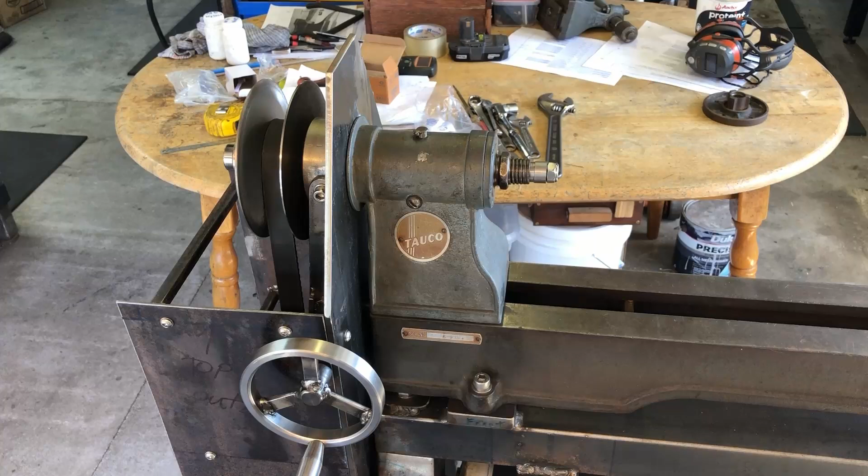Hi and welcome. This is the fifth video in the lathe restoration and upgrades video series.

So in this video I want to finish closing all this area in, which I didn't really get time to do in the last video. And then I want to work on the electrical side of it. So I want to put an on-off switch probably around about here, maybe in line with the wheel center. And then above that, I want to put the emergency stop button that'll be on this panel here. So that'll be over there somewhere.

It's kind of a long switch, so I've just got to make sure it's not going to get tangled up with the belts and pulleys, which it won't. So that'll go there. And then I want to install the RPM gauge or tachometer over here somewhere, and that'll be on that panel as well.

To finish closing in, I need a piece at the back, which I'm going to use some MDF wood. So that's why these bars are sort of offset in from the edge here. So it will be flush with the sides, the back and front sides here. Then it's just a matter of a panel here, a piece across the top and a panel down the back.

Now the piece across the top is important because I'm going to be putting a spindle lock attached to this piece at the top that will come down and interact with a piece of steel that's fixed to the spindle, and that will also act as an indexing mechanism as well, so I'll be able to put it in specific positions for indexing.

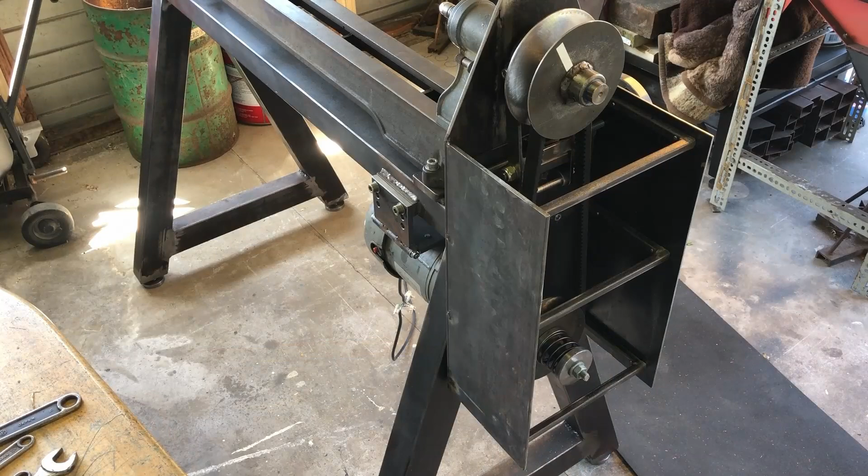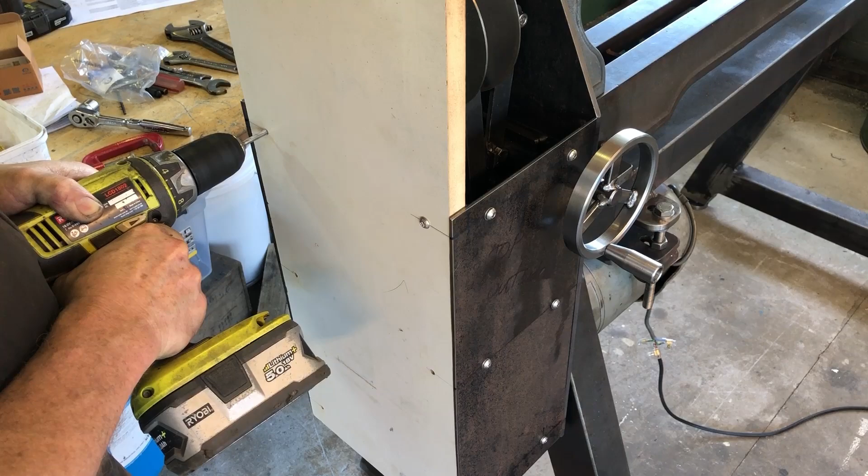Here I am marking out the MDF board. That gets cut to size just with a skill saw, or what we call a skilly. I test fit that in there after cleaning up a bit for the welds, and that fits in there quite nicely. Now, there's a lot of drilling and tapping in this video. I drill and tap all these holes at the back and just test fit screwing that board on, and that works great.

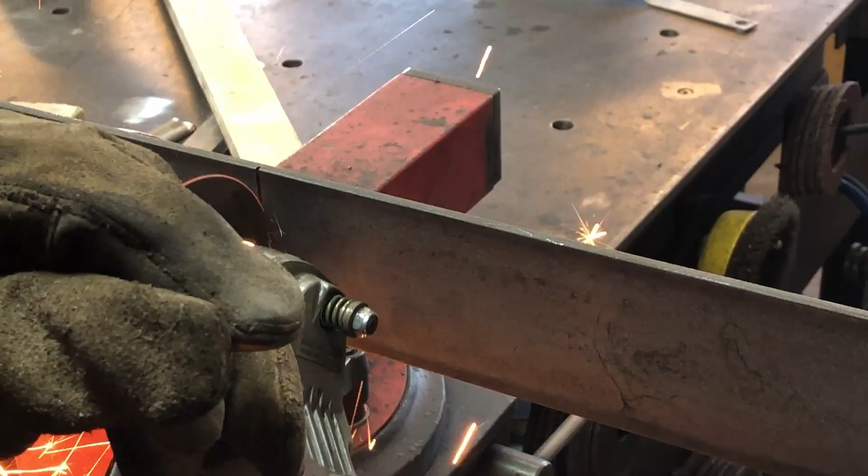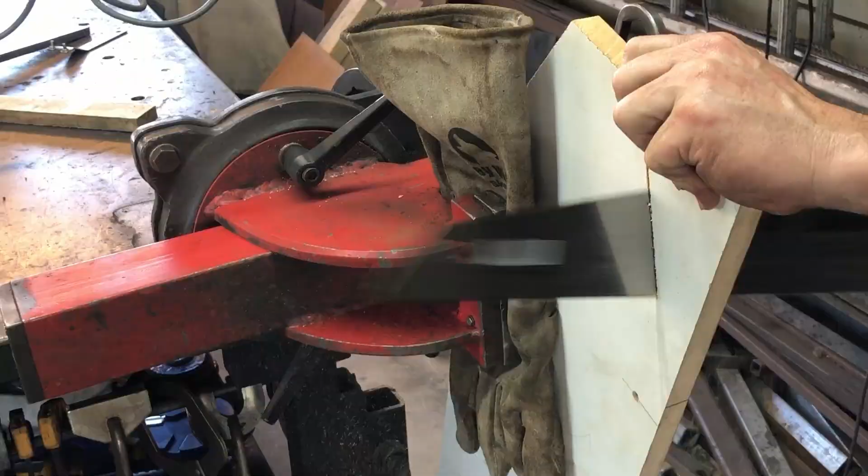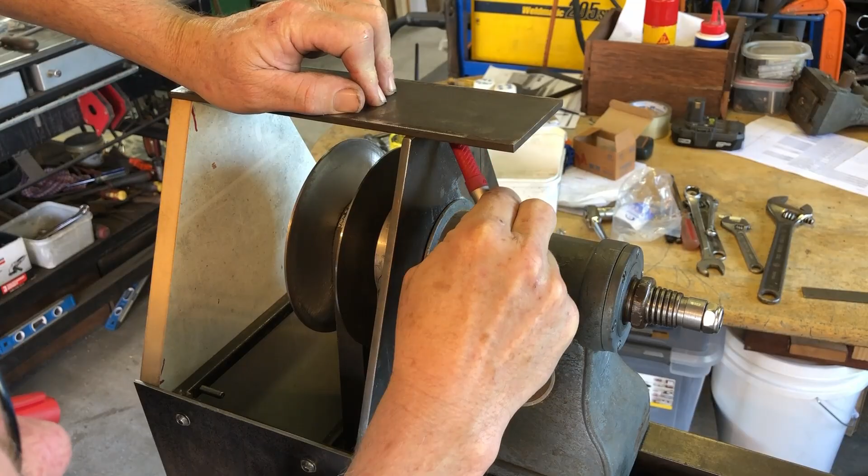This piece is for the top, and I cut it a little bit longer so that I can mark it out on the MDF. I'm just working out here where the angles need to be cut. Those corners get cut off. I just use a handsaw there. And I just clean it up a little bit with some sandpaper. Now I'm just marking off how long I need this piece, and that is cut off as well.

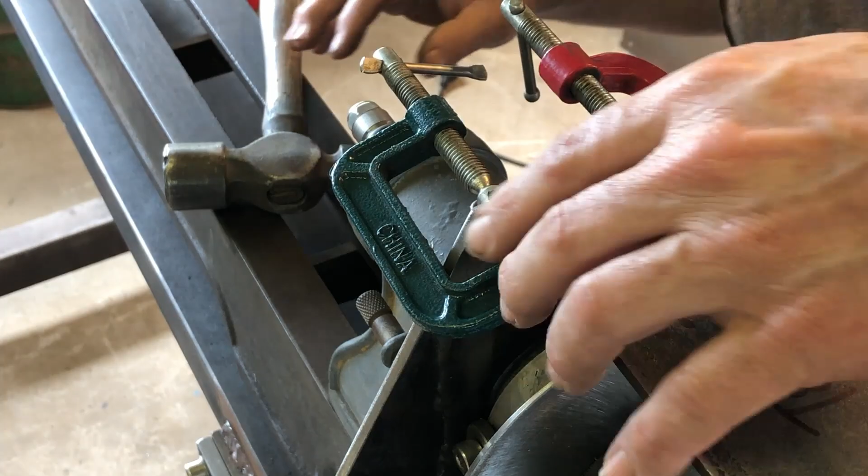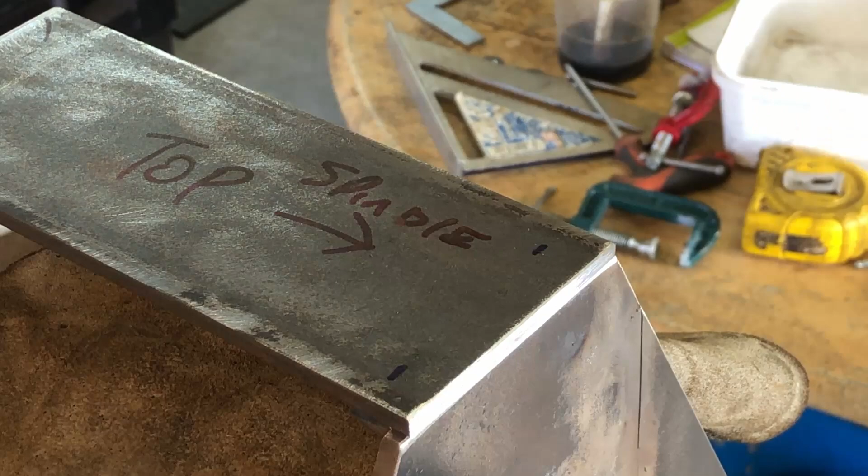That top piece needs to be secured, so here is some 12mm square bar that I use for some brackets. It's clamped on and then welded into place. I work out where I need to drill for the mounting holes. And those are drilled in the drill press, and then I'm using those holes as guides for the threads.

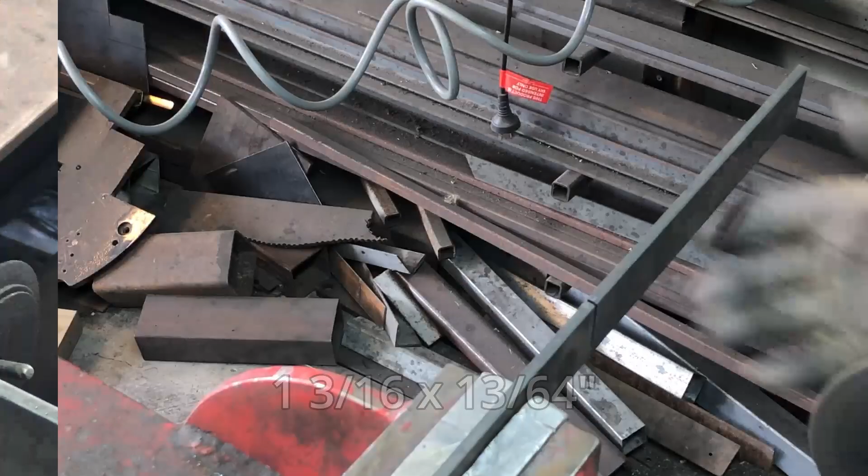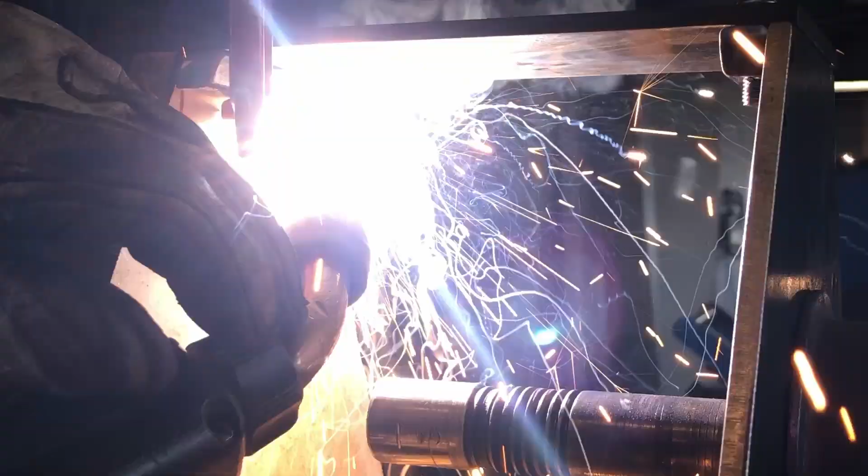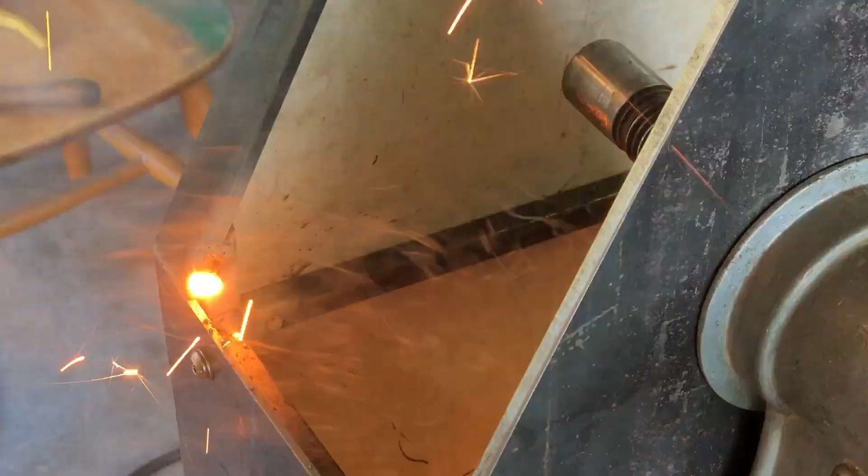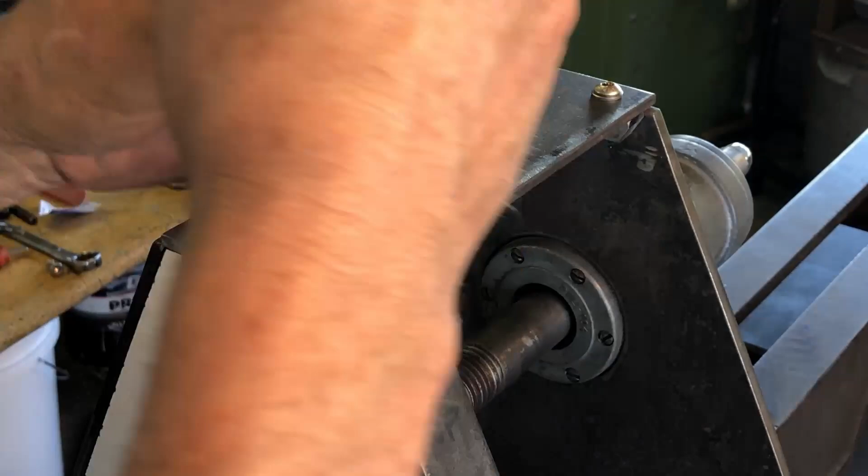I check that the pulley sheave can be fitted in there without any issues. Then I drill and tap the square bar so that this top plate can be bolted on. Now I'll work on the back side of the housing. This is just a piece of 1mm panel steel.

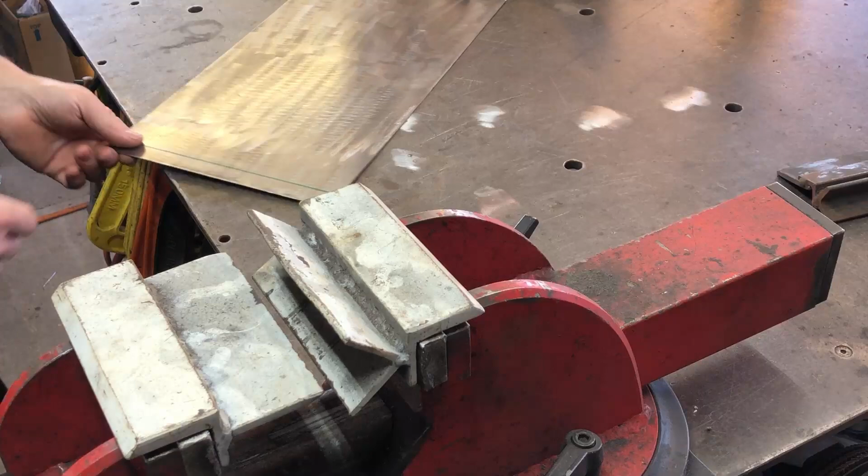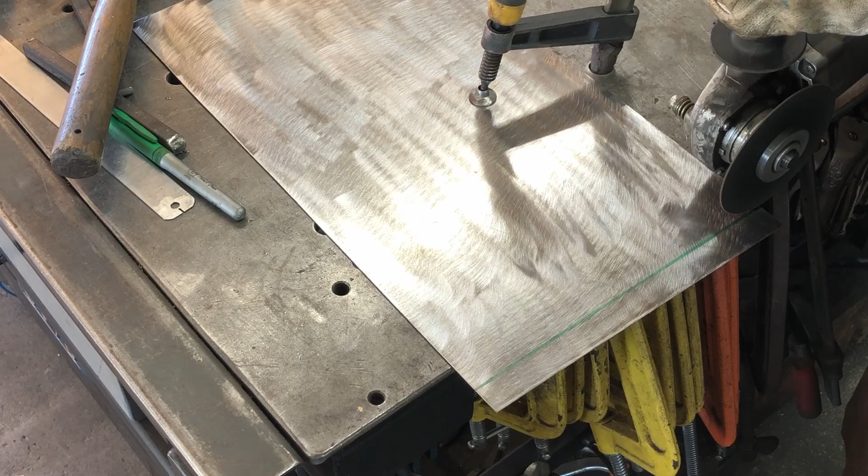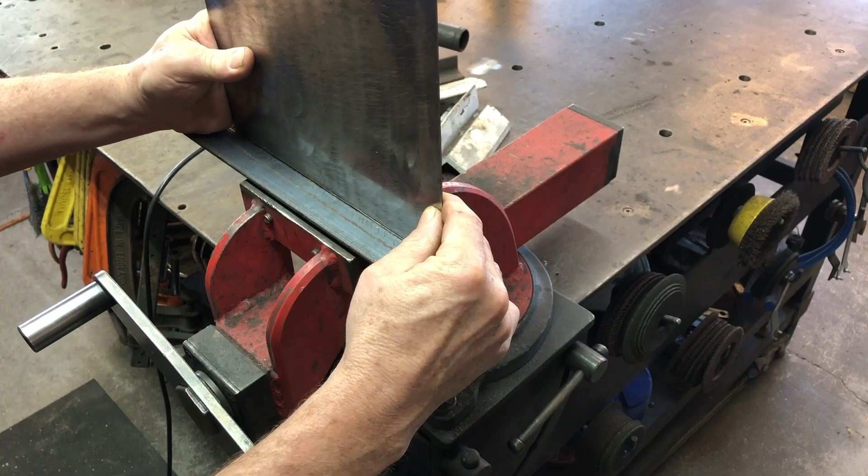I was going to use my vice press brake to bend it, but the bend is too close to the end, it won't work. So instead I score it with the grinder, and then I use some angle iron to bend it in the vise. And this actually works quite nicely. I make a second bend and I just do a little bit of knocking into place there. And then that piece fits on there like that.

Now I've drilled some holes in here. I use them as guides. And then I'm able to drill and tap the holes to hold that panel on. And that is held on by 4 screws, and that part's done.

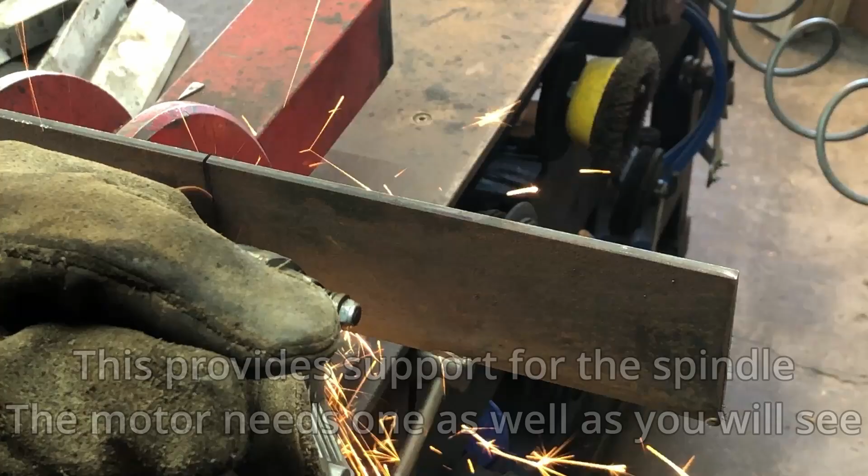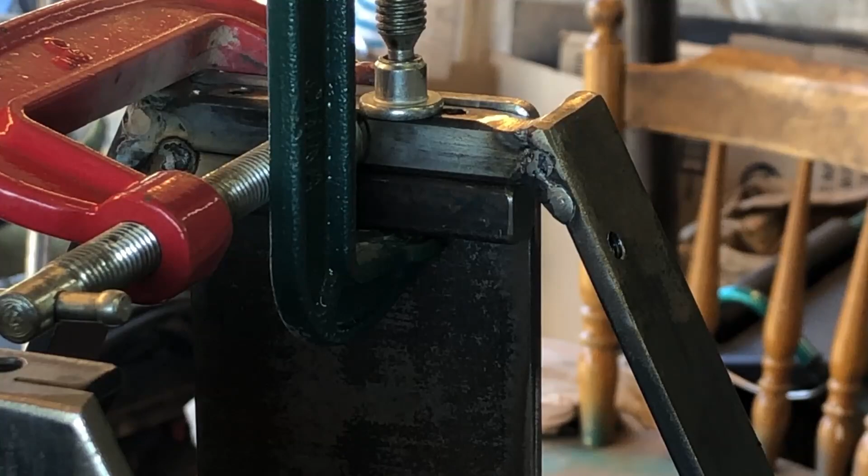Now I need to make a bracket to hold the bearing for the spindle. So there's 2 pieces here. The small square stock gets welded in place. I then drill and tap 4 holes to hold that piece on. Now there will be a hole that gets drilled in the middle of this piece, but I'll do that once I build the new spindle.

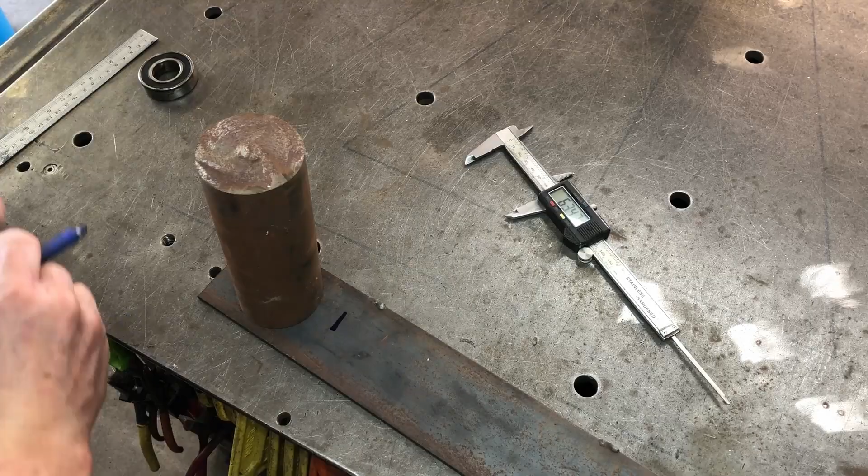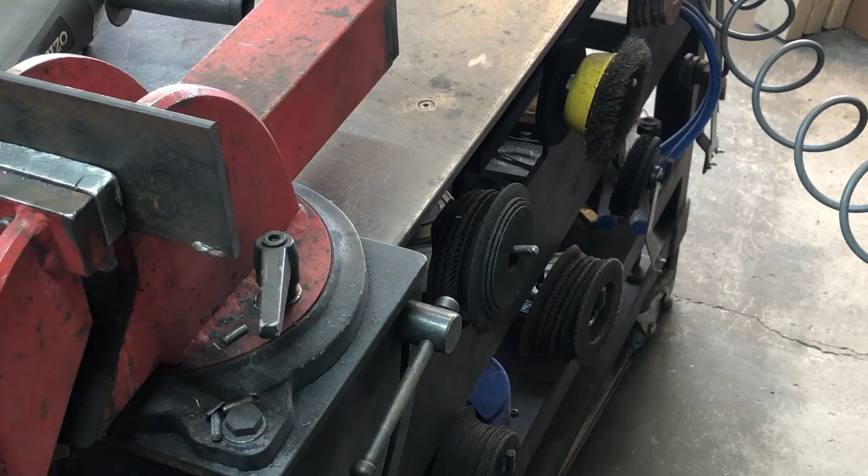The next step is to actually mount this bearing onto a plate that gets bolted onto the plate behind it. Again, I don't have any stock big enough, so I have to make this out of 2 pieces. A bit of flat bar and a piece of round stock. The round stock is cut, and then that will be welded on there. And the round stock will be bored out to suit the bearing.

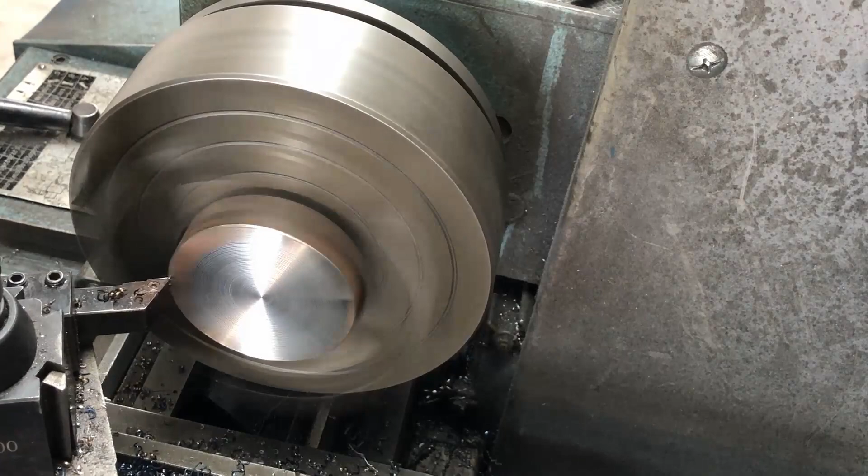I clean up the round stock. And I sort of mark out where it's going to sit inside the flat plate. And then I can bore that out. So this is bigger than 25mm, which is the spindle shaft. Also score a line on there so I can line up this round stock again. That is clamped in the vise, and then I can weld that onto the plate.

That is then drilled out and bored out so it's a press fit for the bearing. Now I found a new bearing that is the same size, so I'm going to use that. And we just press that in with the vise. That fits on to the shaft, which is good, and it will actually get bolted onto this plate at the back. I'll do that when I have built the spindle, so I can line everything up properly.

The next step is to build a spindle lock, which will go about here. Now it's getting a little bit tight, and I only have about the width of my ruler here, which is about 1 inch or 25mm. If I need more room, I can also move that set screw back a little bit and then turn down the sheave. I drew up a plan last night for the 24 divisions, which are 8mm holes, and I need a diameter of about 80mm to fit those 24 holes in.

So I think I'll get it out of this piece of plate here. This is the widest piece of steel I've got, which is 13mm. I mark it where I need to cut it out, and then I do that with the grinder as my plasma cutter still is not working. Then you sort of end up with a kind of a round piece. Let's put in the four-jaw, and it's bored out.

And now I'm working on the shaft that'll go down the center. That is pressed in there. And then I weld it on the other end. Now I forgot to put a center in the shaft when I had it in the lathe last time, but luckily I have this machine part at the back that I can still dial it in. This sounds a little bit like a wood lathe where you make a square piece of wood round.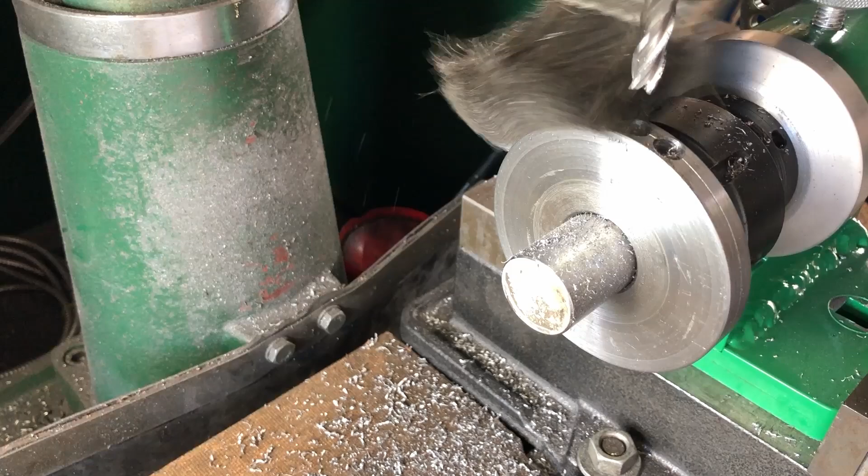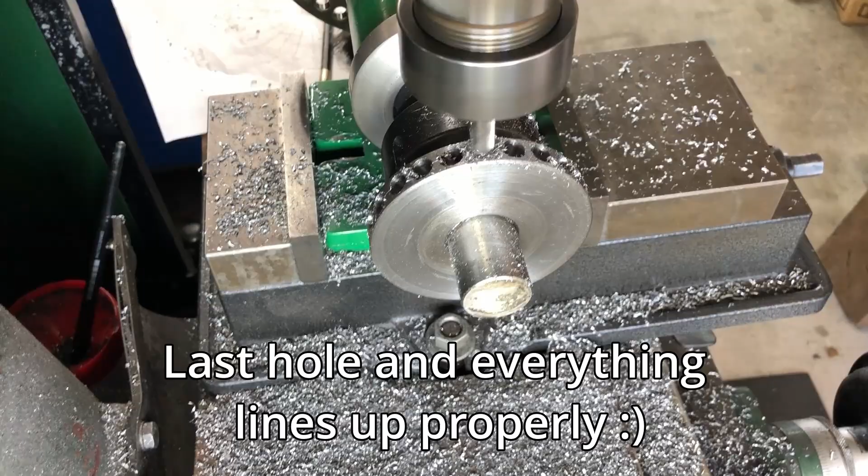Now I've set up in my spin indexer and I'm milling out the 24 evenly spaced holes for indexing and locking the spindle. That's another view of the other end of the spin indexer. This is the last hole and I'm pleased that it's all lined up nicely there. So that piece goes on there, and the bearing and the back cover.

This is how this all goes in here, and I've just got enough room to fit everything in here, so my calculations worked out pretty good. Anyway, the pulley sheave goes around about there. Then we have the indexing wheel, so that's just hard up against the pulley sheave. And then the bearing is at the back here.

Now I haven't bolted this bearing to the back plate. I'm going to do that when I replace this spindle shaft, and then I'll have one piece of steel. At the moment, all I've done here is I've just extended the spindle with a piece of steel, just sort of the right diameter, but it's not exactly perfect. So I'll work out where this needs to be bolted once I get the spindle shaft done.

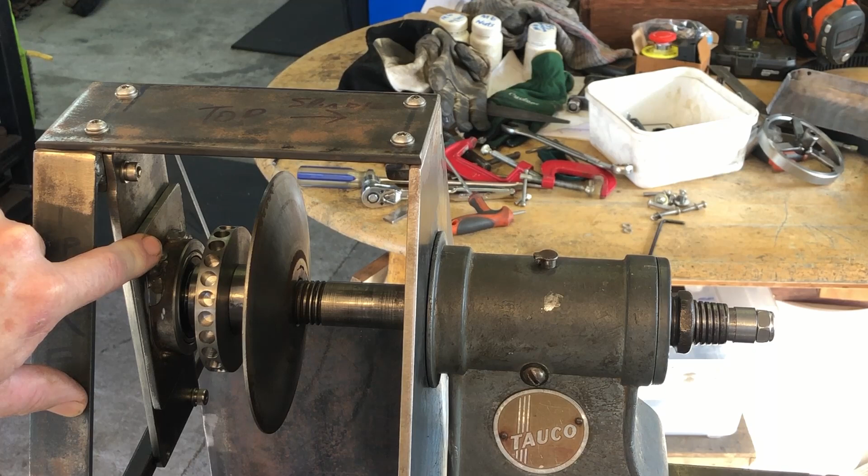So the next step here is to make some sort of detent that can go into these holes, and then that will pop through the top here, so I'll be able to turn a knob and it will drop into one of these holes to lock the spindle. And also there's 24 evenly spaced holes in here, so that can be used for indexing as well.

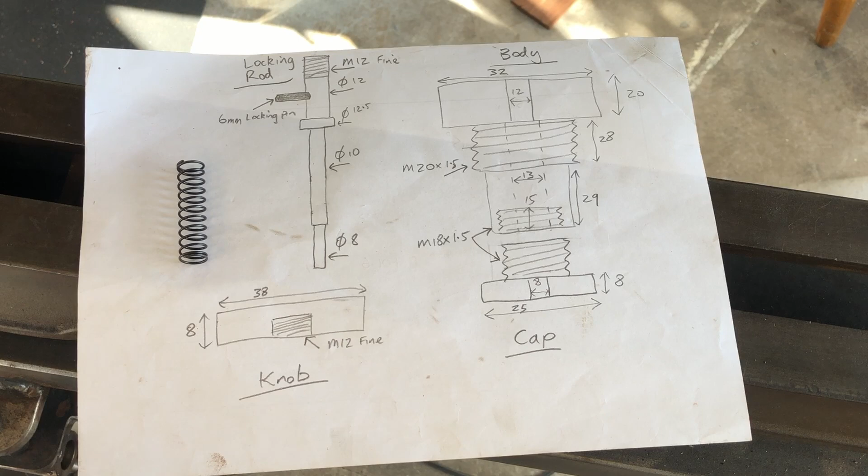Now I'm going to start working on the detent mechanism to lock the spindle. I've looked in my box of springs and I think this is a good spring that will work for this mechanism. So I basically designed the mechanism a little bit around the spring, working with what I've got. Including the spring, there's 5 parts. There's the body, there's a cap, there's the locking rod, and there's a knob. The knob actually screws on to the end of the locking rod up here.

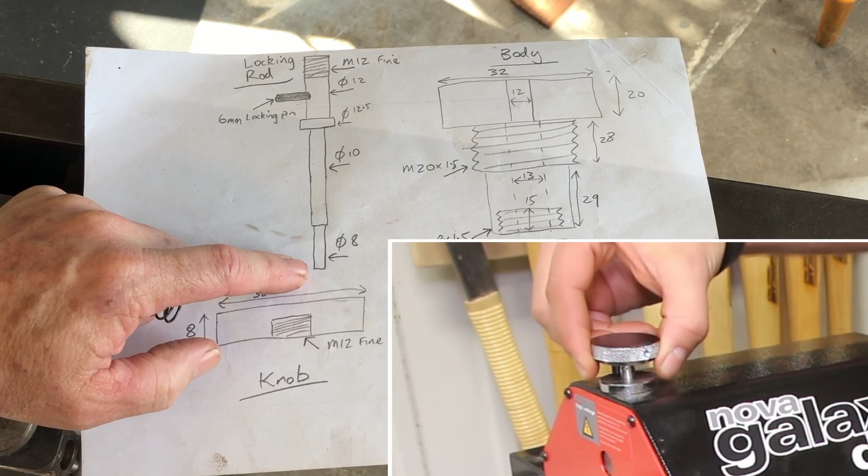Now I've seen companies do this 2 different ways. The Nova lathes by Teknatool have the spring sort of at the top here, so the plunger or the locking rod is always pushing down, always wanting to be engaged into the disc with the holes in it. And it has some mechanism at the top where you have some locating pins and you can actually lock it open. The other way is having the spring at the bottom where the tension is always pushing the locking rod away, and what you do is then you push down on the knob to engage the locking pin or locking rod.

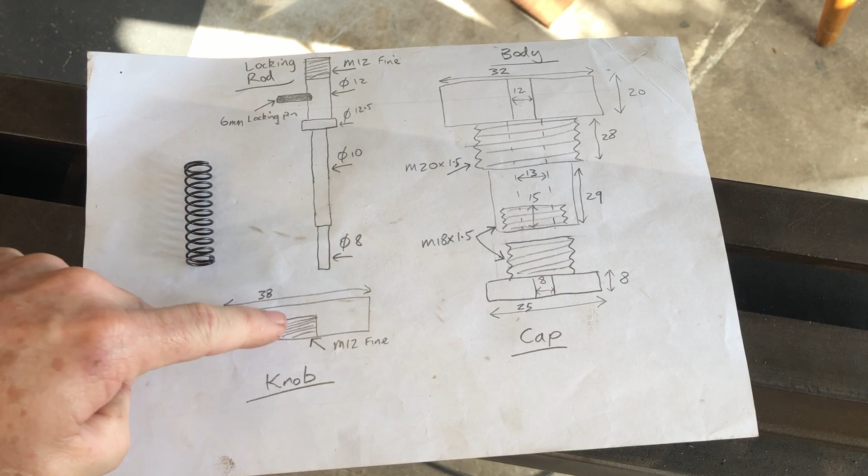And I guess the disadvantage of the Nova way, where it's always pushing down, is if something malfunctions there, then the rod is going to want to go into the holes when the lathe is spinning, and that's not a good thing to happen. And I guess the disadvantage of the other way, where the rod is always pushing away from the holes, is that you need to put pressure on the knob to lock it in. But that's not useful for when you want to do indexing, where you need to lock the chuck and work on your workpiece for an amount of time and then move it to another position and work on it again.

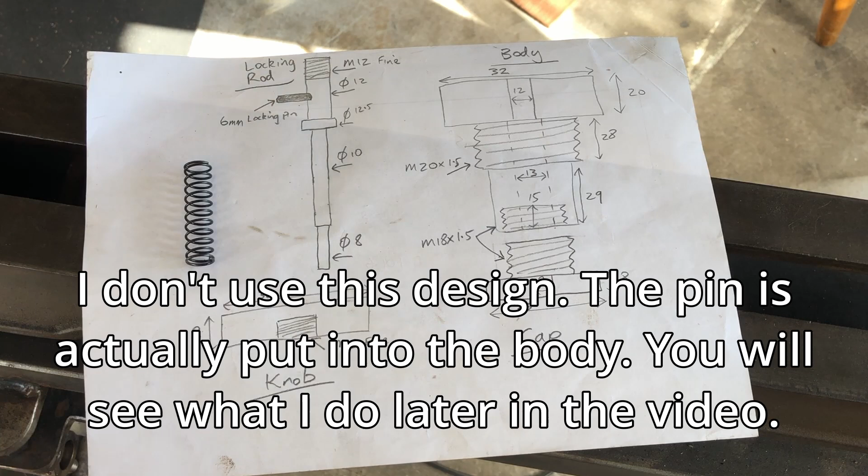And I've seen some people use blocks of wood and magnets to hold the knob down or engaged, and making up all these other ways to do it. So that's what this little 6mm locking pin here is for. That's so that you can actually push down on the knob and then turn it, and it will stay engaged. So sort of get the best of both worlds there. So anyway, it's just a kind of a plunger design, probably don't need to speak too much about it. So let's get into building it.

So I start working on the body. This is 32mm steel bar. And that's turned down to 20mm initially. And I don't have a M20 die, so I single point thread this part. And that nut fits on there nicely. Now I do have a die for the M18 for the end where the cap goes onto, so that is threaded. I drill the centre out to 12mm and also parts of it out to 14mm for the spring.

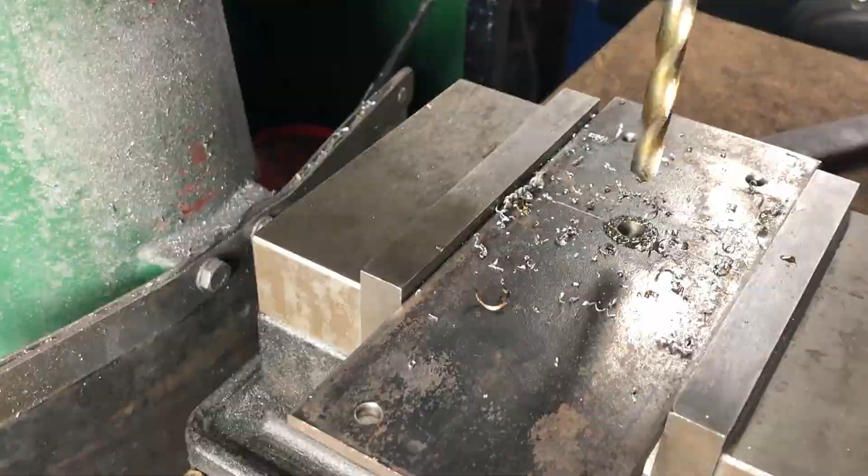Now I work on the cap. That has a 8mm hole drilled right through it. And then I'm cutting the M18 thread here to screw onto the body. And that fits nicely. Now I'm drilling a 20mm hole in the top. This is where the main body will go through. And this is how it all fits together.

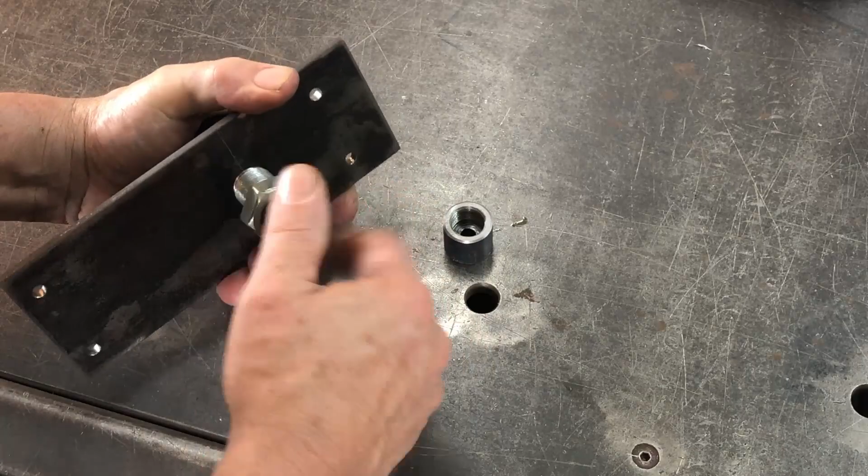I start working on the locking rod, and this is turned down into several different diameters for different parts. So where it locks into the indexing wheel, the inside diameter of the spring, and also the part where it screws into the knob at the top. I assemble that up and test it out, and that works very nicely. Now I start working on the knob, and I start with knurling the outside. And then I sort of taper this in a little bit here.

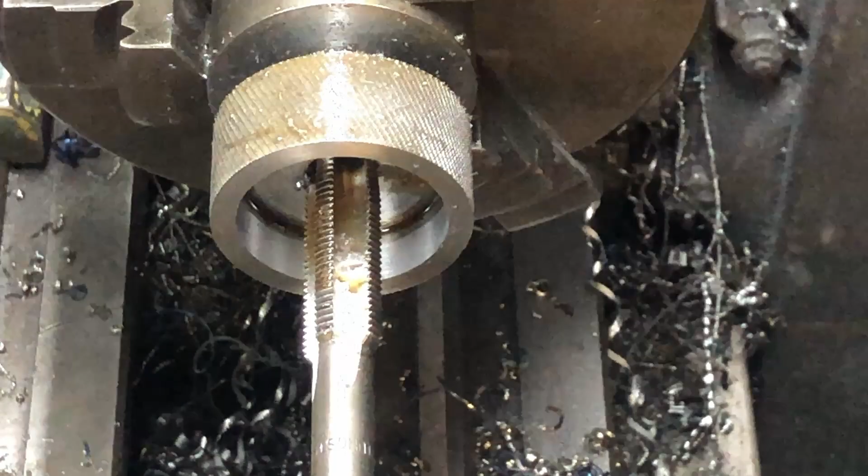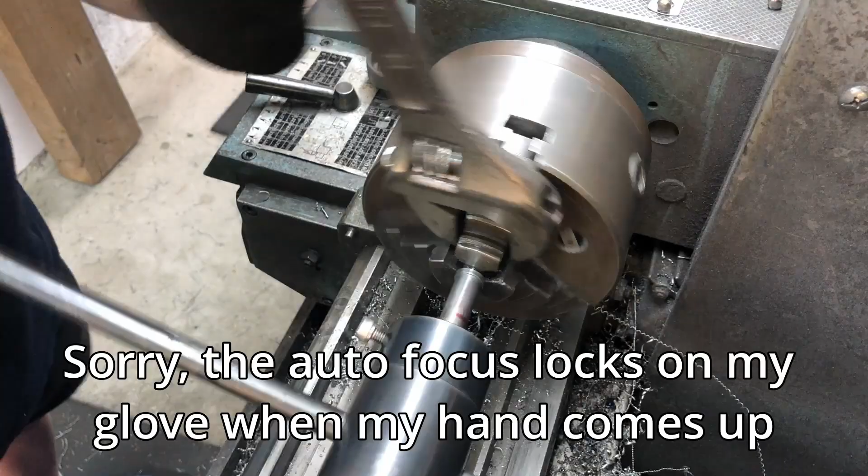I have to take the inside out to fit over the body. And I'm just cleaning up the centre hole so that can be threaded out to M12. Put a couple of chamfers there. Now I am threading the locking rod for the knob. And that fits on there nicely.

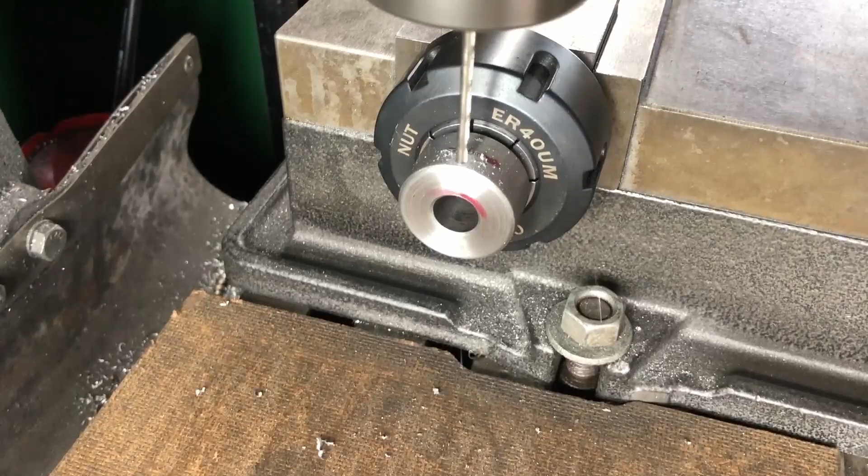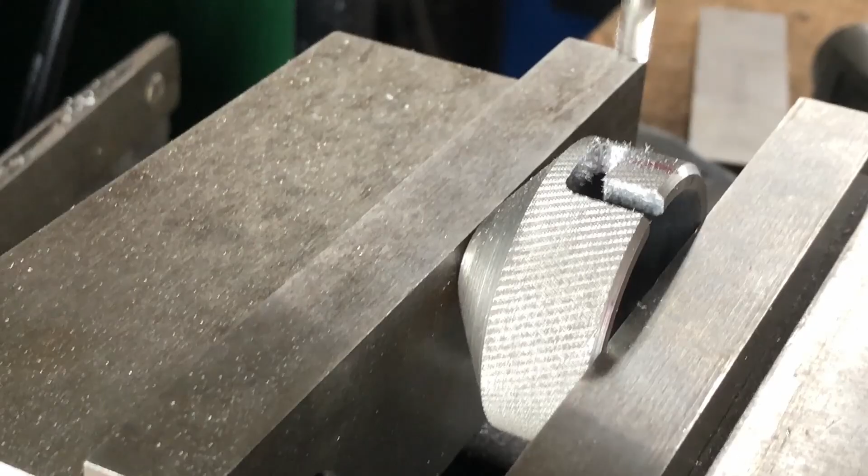This is where it's different to the plans. So the roll pin is actually put into the body here. So I drill a 3mm hole and press that roll pin in. Now I have to cut out the slots for the roll pin to come through the knob. Now we assemble it all up. And this is how it functions on the machine.

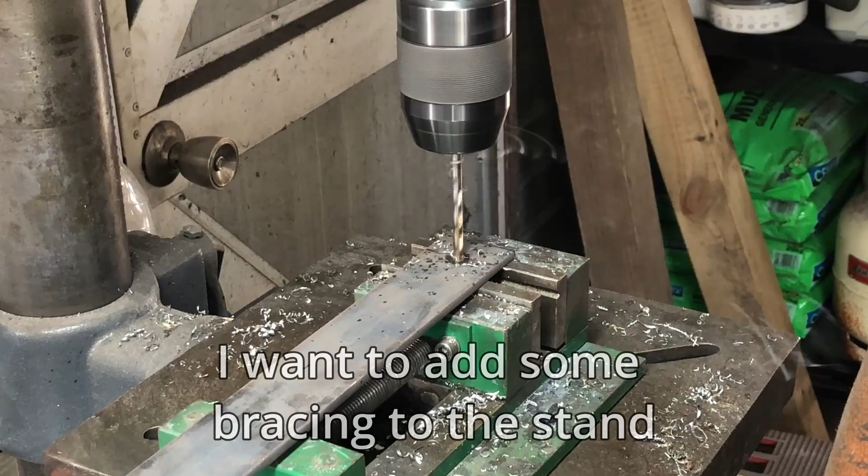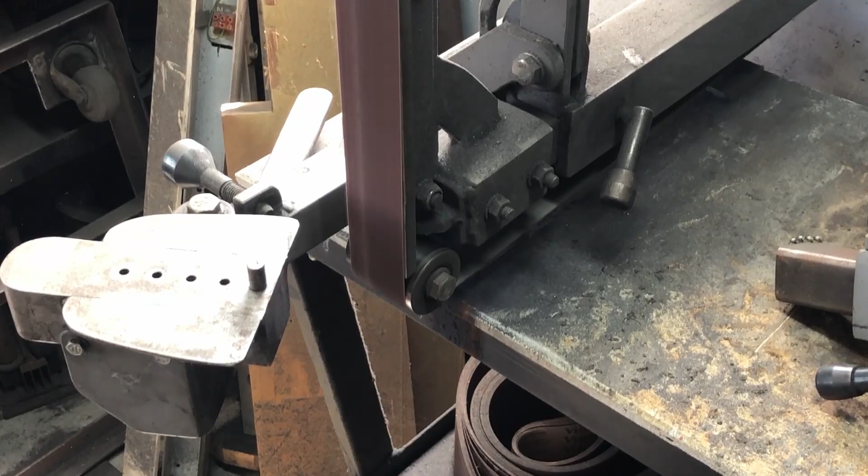Once that is all done, I wanted to add some strength to the stand. These are cross braces that go at the back of the stand. I drill them out to 10mm for 10mm bolts, and I use my homemade radius jig here to round off the ends. These are angle brackets that I've welded to the legs, and I bolt on that brace.

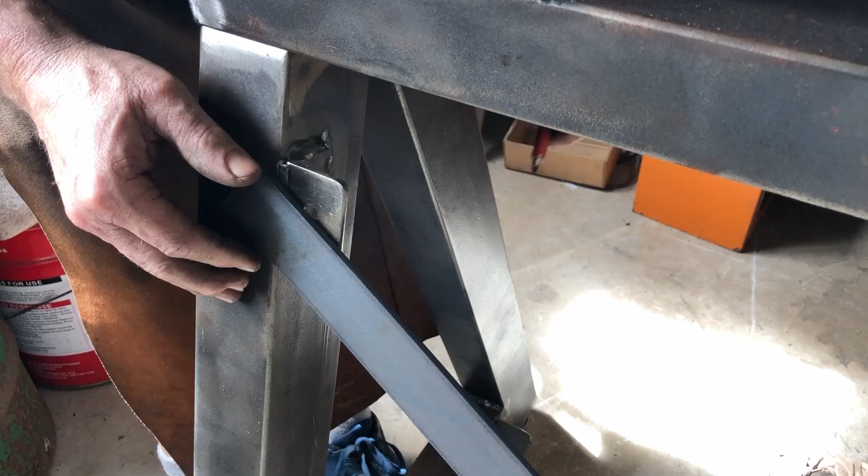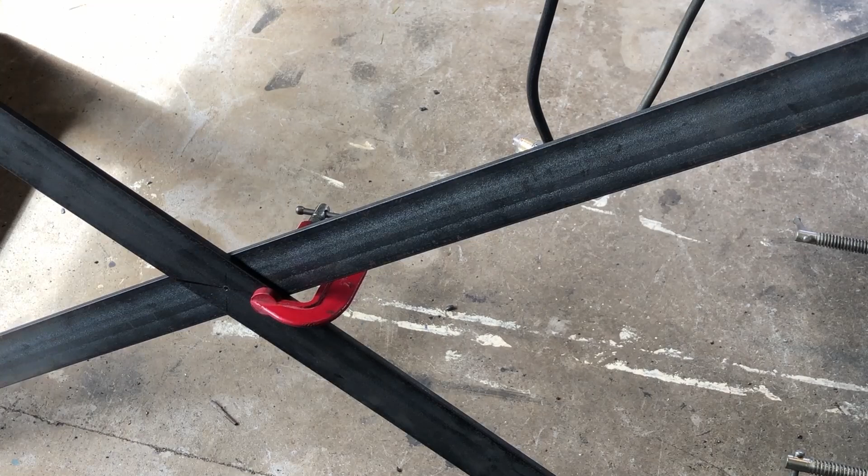Now I'm marking out where to drill the hole for the other end. I do that all off camera and then bolt that brace on. And I do the same for the other diagonal, and now I'm drilling a hole in the centre so they can be bolted together. That is how the brace looks. Now you'll see down the bottom I've put some angle brackets down there as well. They are for a platform if I need to add one to the lathe at a later date.

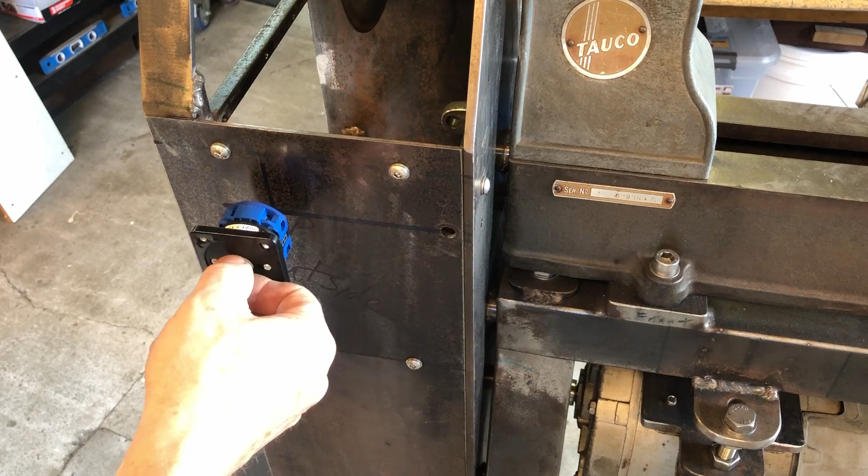Once that's all done, I'm going to start working on the electrical side. This is the main switch for the motor, and that's going to go there. I mark that out and I drill the mounting holes and the centre hole for the shaft to come through. That gets screwed on to the front panel.

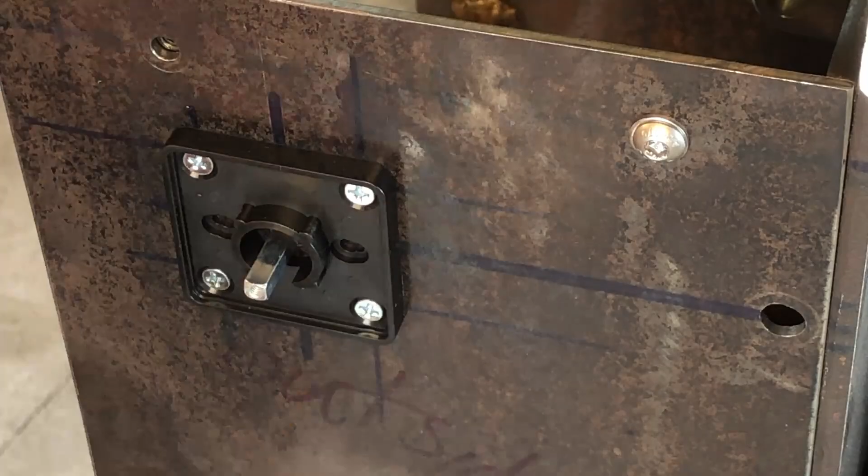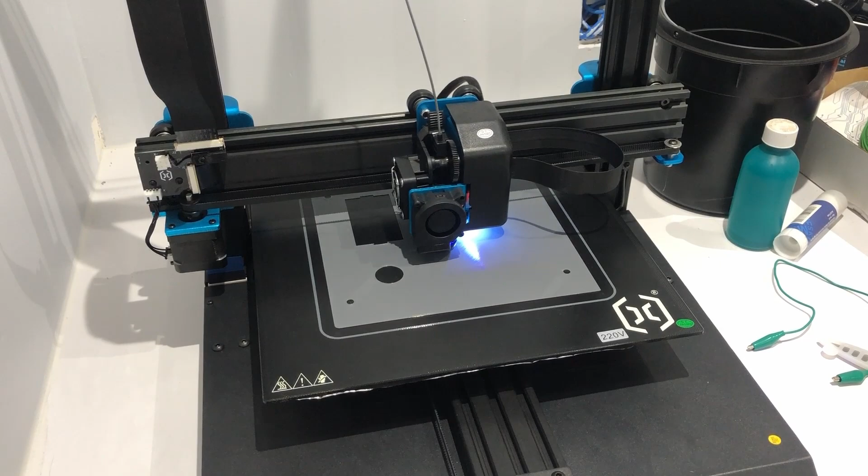Above that switch there will be a panel that has the emergency stop and the tachometer. So I start that off on the 3D printer. And while that's printing, I'm welding on some lugs that the 3D printed panel will need to bolt onto. So there's one at the bottom and there's another one at the top here. So they're drilled out and tapped so that the panel can be screwed onto the front.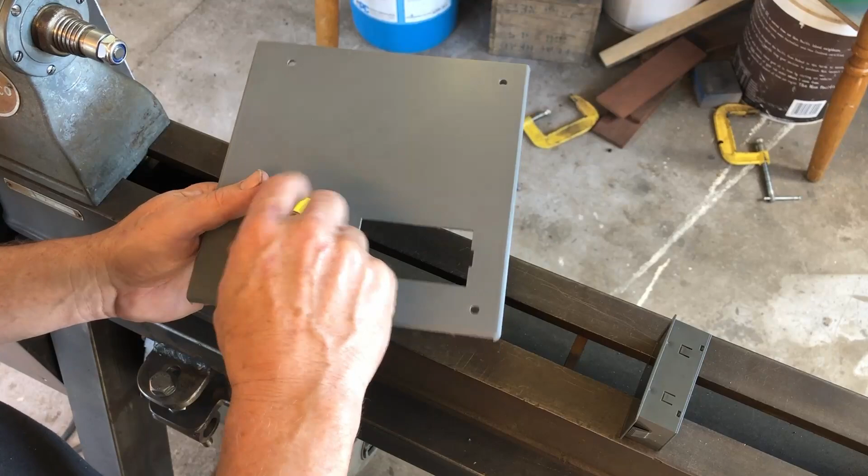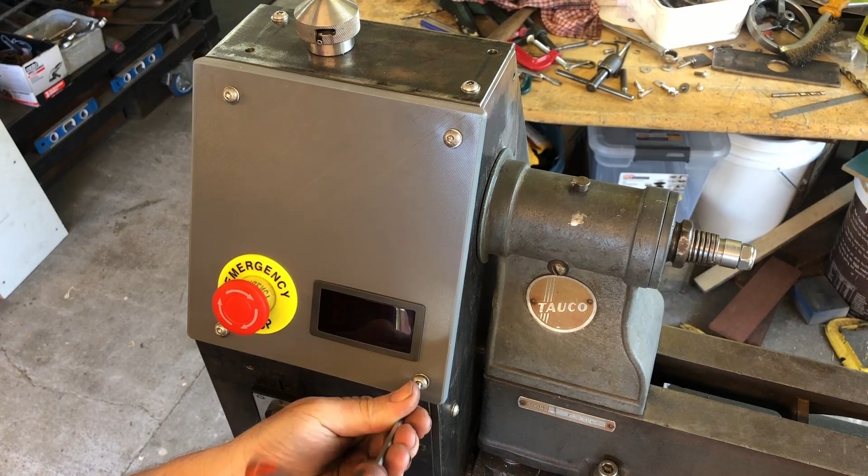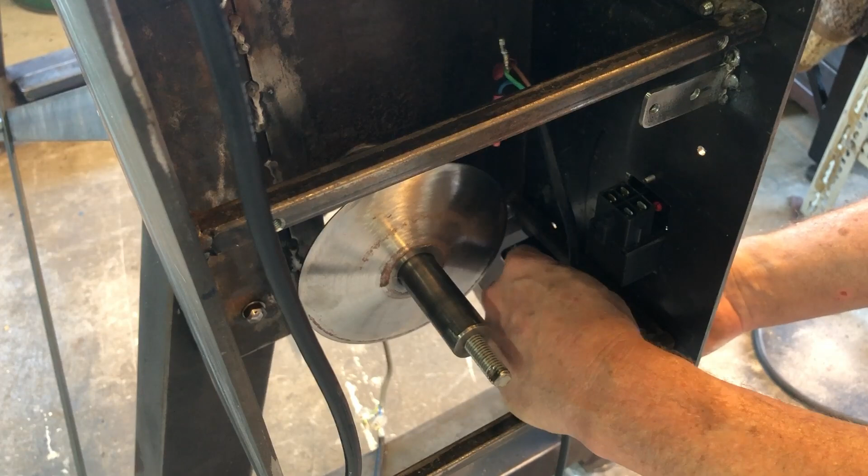The printing is complete, so I assemble the panel with the emergency stop switch and the tachometer. And then that is bolted onto the front of the lathe. On the other side we have all the wiring. This is the main cable that comes from your wall socket, and that will plug into those terminals you see down the bottom there, which is a no volt release switch.

This is the main wiring loom. At the top it has the emergency stop switch, which I'm screwing in. Below that is the blue motor on off switch. And below that is the 12 volt power supply, which runs the tachometer. That main wiring loom comes down to the bottom here and fits into this bracket and goes out to the motor.

Now I didn't film any of this because our wiring here in New Zealand might be different to other countries. Also, I am not an electrician, although I've taken precautions here and I've made sure that I have really good earth connections. I've crimped and soldered all of my terminals on, and I've used heat shrink insulation around them.

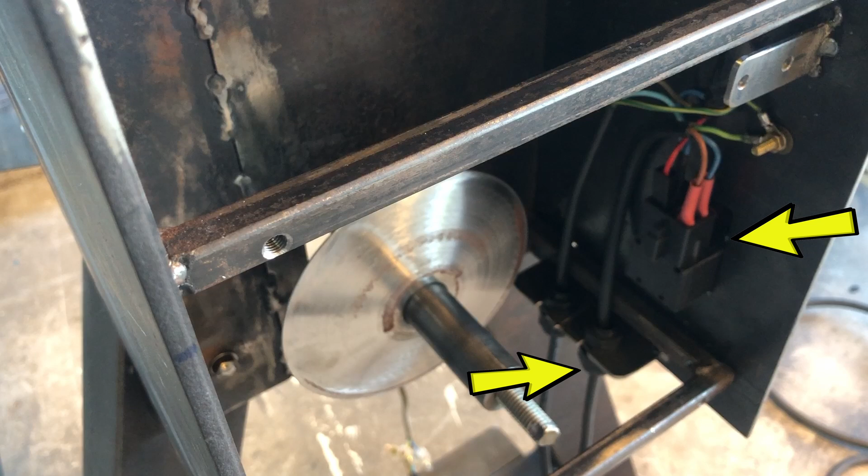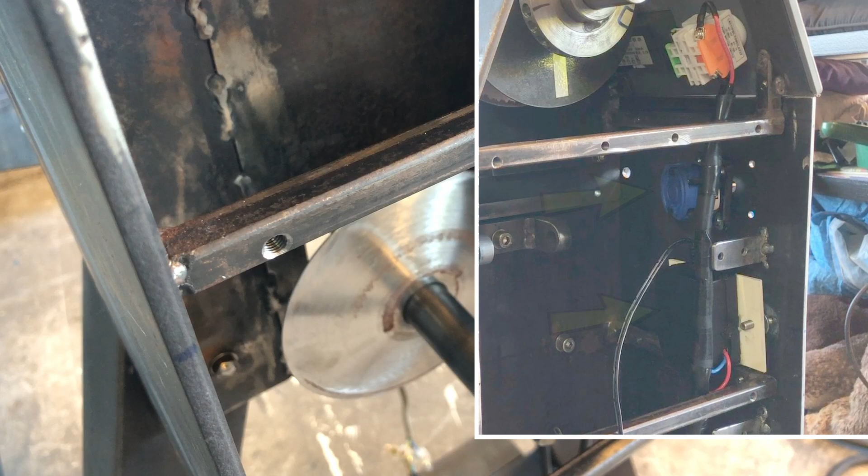But basically the power comes in, goes to this no volt release switch, then it goes up to the emergency stop switch, and then it comes down to the motor on off switch and also feeds the 12 volt power supply, and then it comes down to the bottom and goes out to the motor itself.

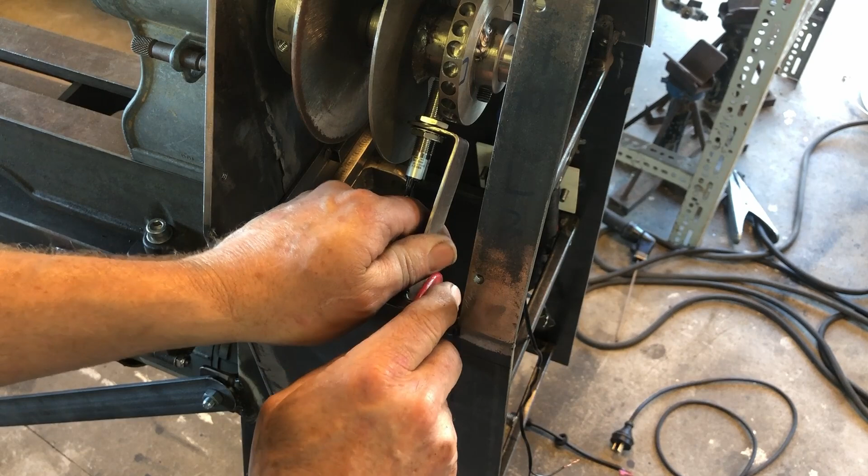So once all that wiring is done, I work on the sensor for the tachometer, and I've made up this bracket that holds the sensor. And I've just clamped it in place. I drill some holes and this bracket gets bolted on. It needs to be bolted on so that it can be removed so that I can get the pulley sheaves in and out.

Once that is all wired up, I test out the tachometer. I'm just turning the spindle by hand because I have no pulleys and belts in there at the moment, but that all works fine. The next step is to pull it all down and paint it.

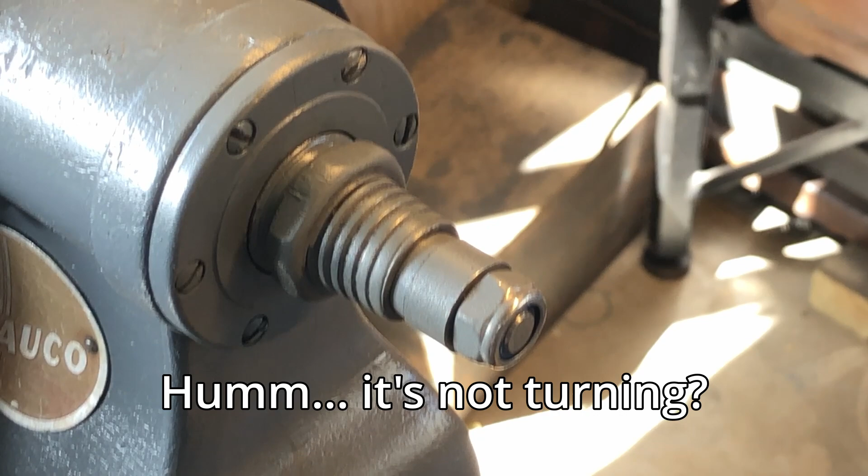Well, that is the wood lathe practically finished apart from the spindle, which I will build in another video. And let me get back to you about why the spindle wasn't turning there. I'll bring you in for a closer look.

Pretty much everything is the same as it was before I painted it, although I have blued the handle and the top lock here, and I went to a black cover here instead of the grey one that I had initially. I don't know if you can see it on the camera, but the finish here wasn't too good on the 3D printing. So it's always a challenge to work out what colour to paint things.

I went for the grey for the lathe as it was originally, or maybe this is a bit of a darker grey, and the motor is the same there. So I went for the black on the stand, pretty common colour for stands I guess, and the box housing here I went for a maroon colour. You know, the black switches and stuff and the sort of dark handle here makes it look quite nice, I think.

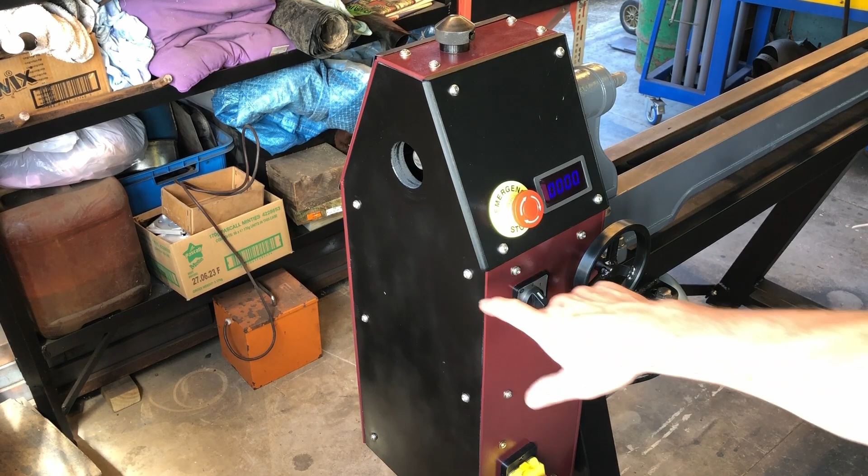The end of the lathe here has been covered in with some MDF, and I've just painted that black, and I've put a hole in the back there. That's for the spindle to come through when I make it in the next video.

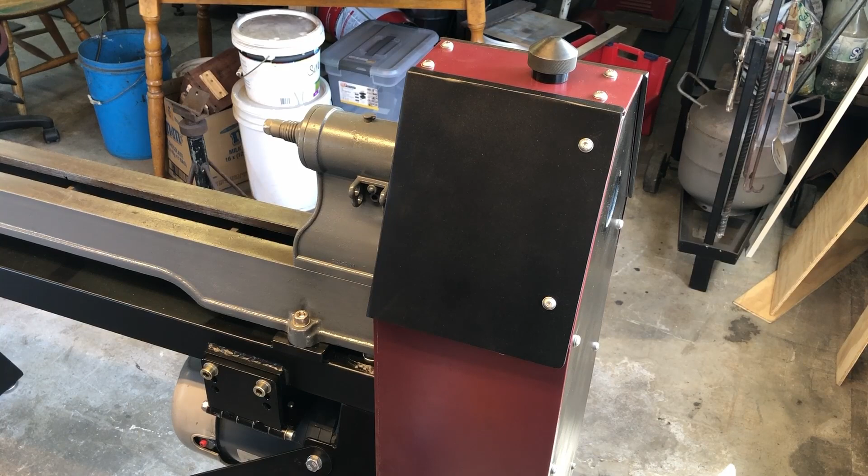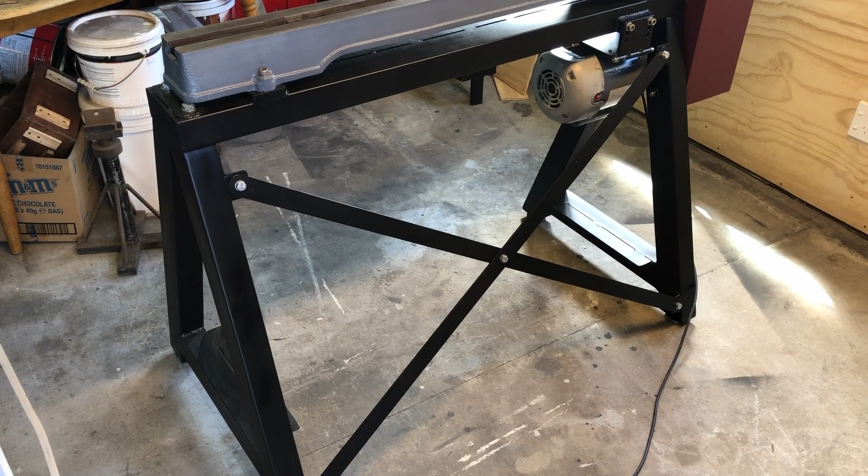Around the back of the lathe I've got this sheet metal panel that I made up earlier, and just painted that black as well. As you saw earlier, I made these cross braces at the back. That was just to give it some support. Without them, the legs are only held on by the 2 bolts at the end there. I don't know if this was entirely necessary, but I thought while I was working on the frame and doing all the welding, I should just weld some brackets on and make these cross braces.

Now I'm sure you're all very eager on watching me fire up the lathe and actually turn some wood on it. But as I was putting this all together, I was just testing it out, and I had a major malfunction with the lathe. There was a bit of a bang, and then this fell out the bottom. Yep, that's the bottom pulley, the one that's on the motor. So what's happened here is the motor shaft is actually broken clean off here.

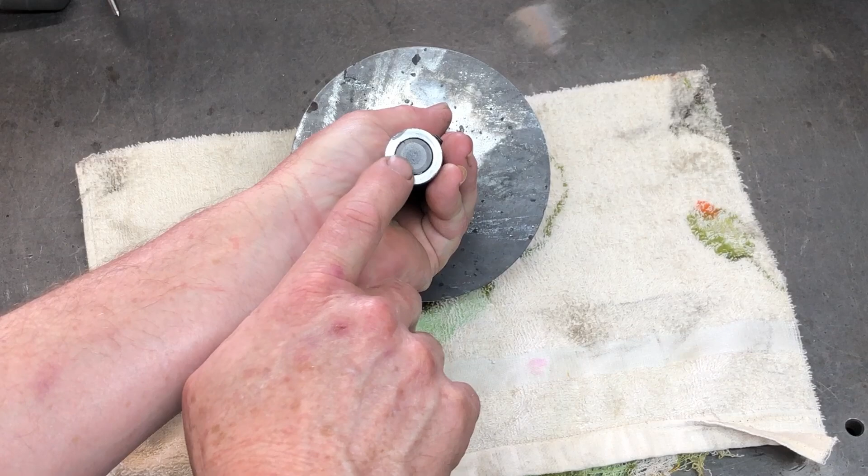Now I knew that was kind of a long distance here and a lot of strain on the motor, especially with this bigger spring in here which holds the belt quite tight. So there's a lot of pressure of the belt pulling these pulleys up, and of course that's putting a lot of load on that shaft there as well. And I did intend to turn another piece here that has a step on it for a bearing. So similar to what I've done for the spindle bearing, just a bit of end support there. But I didn't really get round to that. That was probably going to be in the next video as well.

But unfortunately that motor shaft is broken clean off, so I cannot run the lathe and show you how it works. And I've just finished wiring that motor up, and it's got the bracket with the hole spacing to suit the motor that's on there, so I'm going to have to find something that is similar, I guess, that will be suitable.

Well, this setback is quite disappointing, as I really wanted to get the lathe up and running and make something. But as they say on Galaxy Quest, never give up, never surrender, and I will strive forward and troubleshoot and fix this issue.